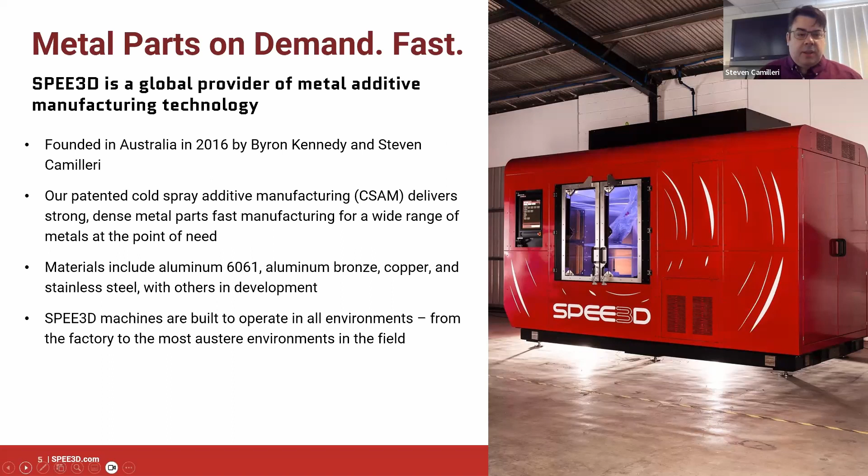A little bit of background on SPEE3D. As Aaron introduced, we're a company that makes cold spray additive equipment. The company's been around since about 2016, and really we focus on being able to make metal parts very, very quickly. Indeed, we've been doing a lot of work with various defense forces doing that in the field as well. So I might throw to the next slide, and I'll yield to Pierre.

Thanks, Steven. Part of this presentation today certainly couldn't have been done without our research partners. Some are on the academic side and some are on the commercial side, but we do things quite differently at SPEE3D.

With our technology, it's very much an open system. So you have the ability to really broaden the range of materials that you're able to work with and able to research, really. So with that increase in the material portfolio comes an exponential increase with the number of different applications and alloys that we can take a look at. And we can't do all of those things internally at SPEE3D.

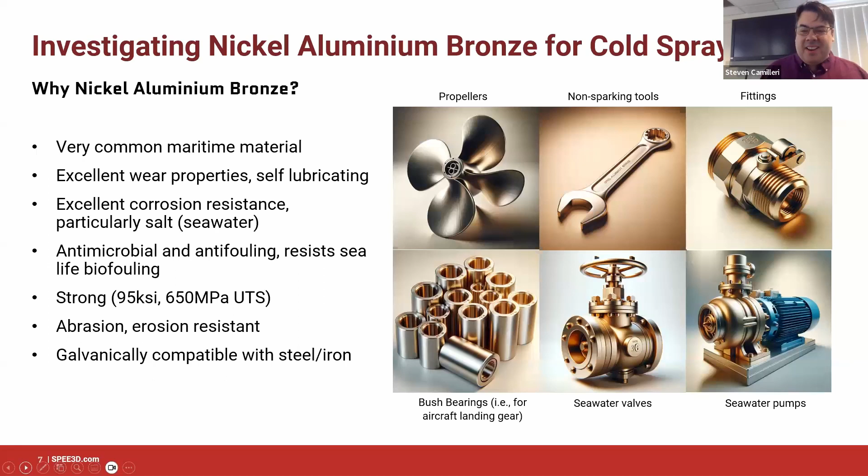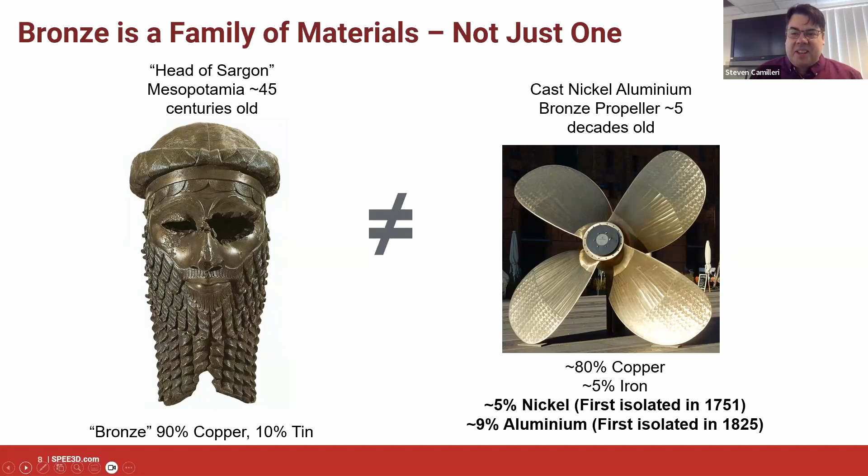On the right, you can see a ship's propeller made from nickel aluminium bronze. So these are not the same material, despite both being called bronze. Just like steel, there are many types of steel that behave very differently. There are many types of bronze that behave very differently. So in particular, the nickel and the aluminium are not ancient materials. They're modern materials that were isolated fairly recently. So that's a completely different material. And I just want to make that clear that we're not talking about the image on the left today. We're talking about the image on the right. Okay, next slide.

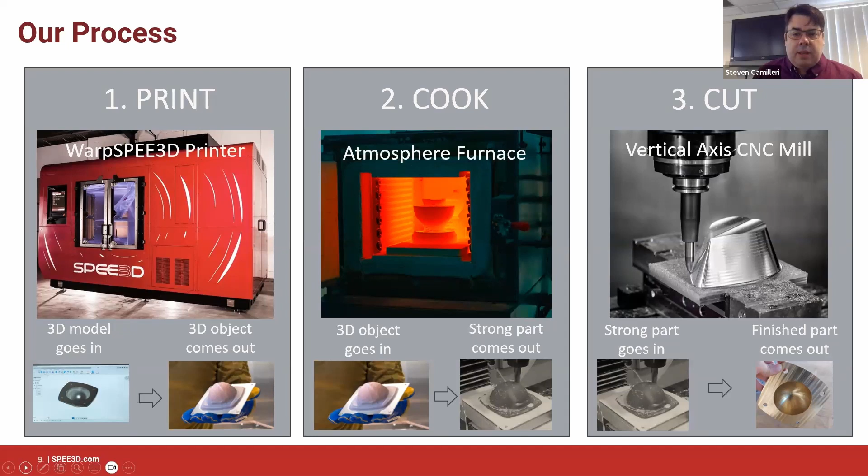So how do we go about developing a new material for our manufacturing process? Where's the work, where's the effort? So we just wanted to make a few points today to describe what we normally do. So where's the work? We start with the feedstock powder or powders. This is often an iterative process, you try something and then later on you try something else once you've determined it needs to be different. We have to work on the best way to spray it. So most of the cold spray community will understand this part very well. It's all about temperature and pressure and the tool pathing properties. The resulting material is then heat treated. We have to determine the best way to do that.

Heat treatment is a very open process. There are lots of different ways to do it, particularly navigating time and temperature. Then we test the material and determine where there are opportunities for improvement, and we go again. This iterative process, going through again and again, is how we develop a cold spray material.

Once we're at the point where the material performs as we would like, and we've determined that we can generate the material properties required to a minimum level over and over again, we establish our quality controls, we write our operating procedures and our quality processes, and then we generate a data sheet that provides a minimum performance level.

So this is a little bit unusual in the AM world, the idea that we're promising a minimum performance level from the material. Most of AM has a kind of suck-it-and-see approach when it comes to material properties. But if it's a manufacturing process, people need to be able to use it. To be able to use it, they've got to know the material is going to work.

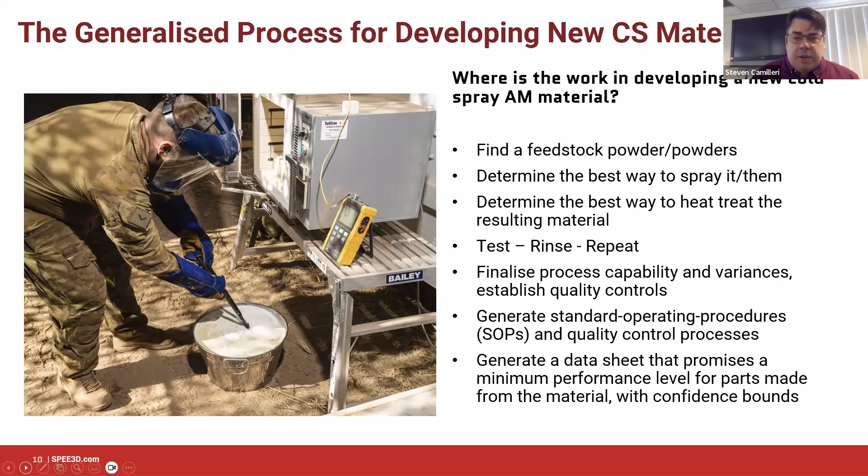The next step is to work out how to get that to deposit and then to hit the composition of the alloy that we're targeting. That's a non-trivial step for reasons that we'll address in a moment.

Having done that, we move into the heat treatment phase where we're looking at processes like homogenization and bond formation. The next step beyond that is hardening, because for any structural material, we have a strong preference for materials that have a thermal hardening mechanism. The reason for that will become clear in a moment.

At the end of all of that, you've got something that looks like an alloy, and then you do your tensile testing, as Steve said, and we look at that stuff very closely. We look at micros, we look at fractography, and we decide what we don't like about what's going on and how we're going to amend that. Then we go through that process of iteration.

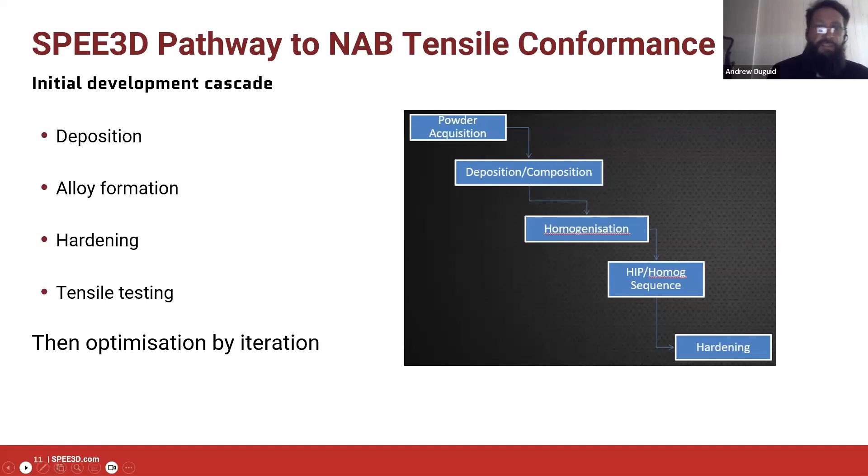They're all present on the grain boundaries. No doubt they've formed all sorts of odd intermetallics. It's possible there's been some inadvertent hardening—the thermal hardening mechanism has actually operated inadvertently throughout the production of that powder. What that means is that we're left with a powder that's not actually particularly sympathetic to being sprayed.

It's not to say that you can't do it. Obviously, people do it all the time, but you have to go to a higher degree of effort to overcome those sorts of problems. Another whole avenue that people explore here is solutionizing those particles and rendering them into a softer state—also a good way of solving the problem. But we take a slightly different approach to that, by and large, so we might move on to the next slide.

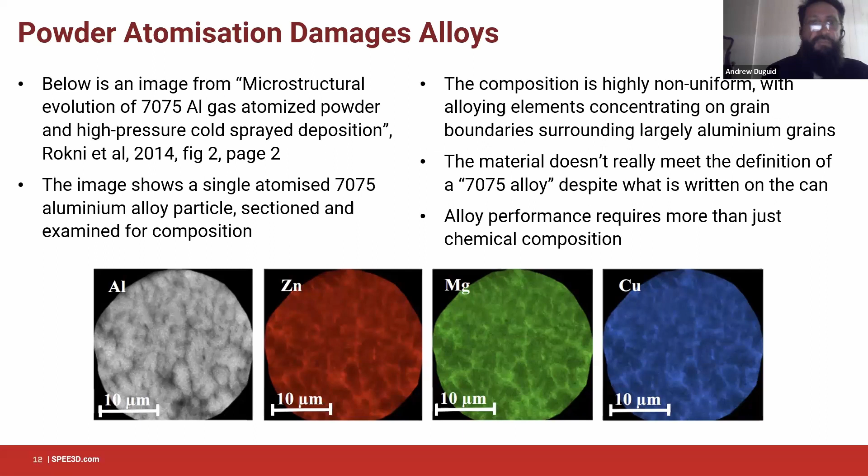It's difficult to spray highly alloyed powders. It's not impossible, but it does make life a bit harder. As a loose generalization, the higher the alloy content and the more aggressive the hardening mechanisms, the greater the difficulty you get. The powder's harder, it's more difficult to spray.

So what that means is you're bucking all of those other things, like higher expense in terms of getting greater nozzle energies, or living with poorer deposition efficiencies, lower build rates. And a critical one for us is what you're left with in terms of porosity and residual defects.

NAB is a quite rich alloy, its alloy content is about 20% and it's quite hardenable. So for us, it's quite desirable to find another way around that.

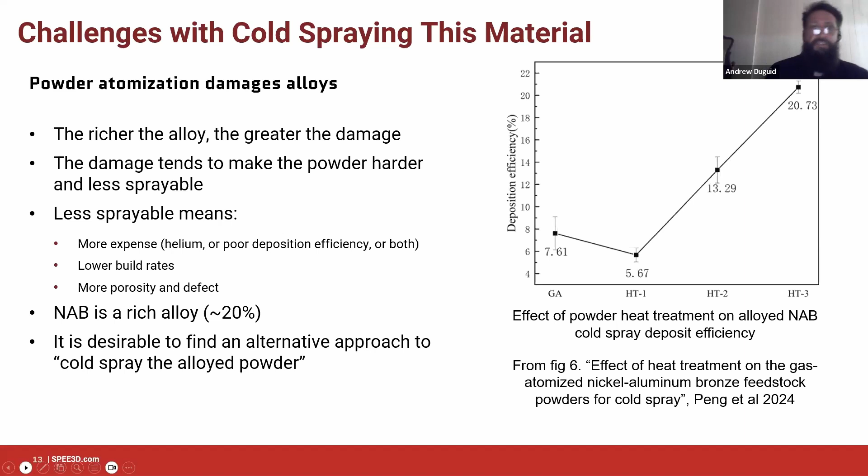Our observation right from the start, almost inadvertently, is that everybody starts out cold spraying elemental powders because elemental powders are soft and easy to spray. So we've developed a methodology where we look at either spraying blends of elemental powders or spraying combinations of master alloys. We take the basic alloy and break it down into more cold sprayable components.

That might be splitting the alloying elements into two major groups and spraying a blend of two powders that each have some of the alloy constituents in them. Or it might be actually breaking the alloy down completely and just spraying a blend of elemental powders.

Unfortunately for us, that's about the limit of feature formation in our AM process. If you're below 40%, you really can't form the features on the part particularly well. So that wasn't particularly attractive.

Happily, what we found is that when you sprayed the elemental blend, we got a pretty substantial increase in deposition efficiency. There's a slight trend with the aluminium content, and it seems to plateau out from about 9.5% on. So that's the first stage.

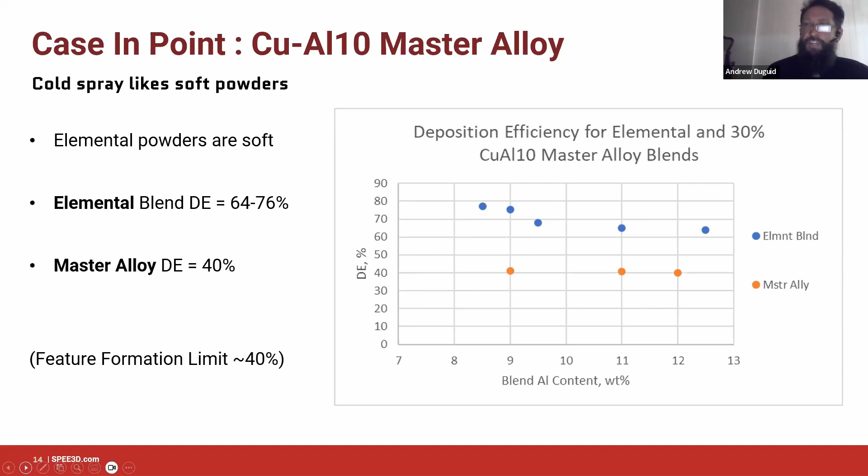We selected our powders and worked out how to get deposition. Then you can imagine doing this sweep across the aluminium content—dialing in the aluminium content of the blend so we wind up with the right amount of aluminium in the alloy at the end. This told us we were way better off just sticking with an elemental blend.

We start out with elemental powders, which is what we landed on. We blend those, we cold spray them. We do some heat treatments, winding up with a hardened alloy at the end. The critical thing to look at here is this homogenization process.

We're pretty happy with that. Anybody who comes from a powder metallurgy background would be overjoyed to see that—it's got almost no porosity and there's intimate metal contact, two very difficult things to achieve in classic powder metallurgy. And the question is, but that's not an alloy, that's a physical mixture. So what do we have to do with that?

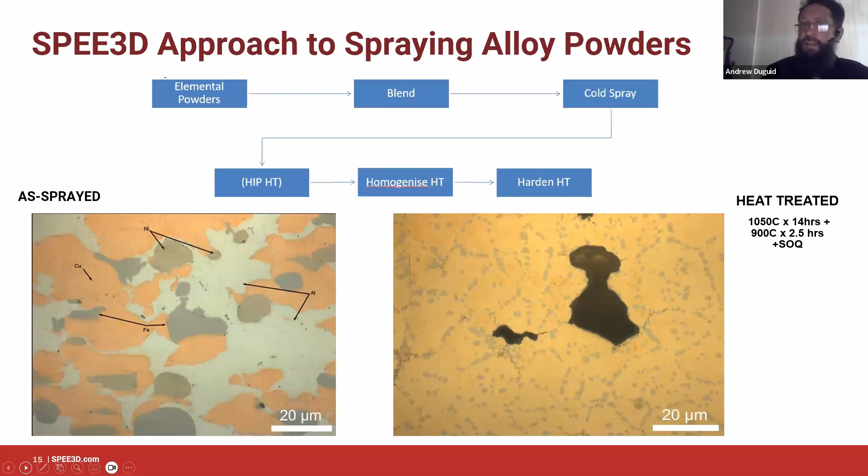If this was the first time we've done an alloy, we'd say that's fantastic - we've achieved homogenization, the microstructure looks pretty well resolved, and maybe we've got a little bit of a problem with porosity that we'll have a think about. You can see the heat treatment on the right there.

Okay, so here is where we started to really dig into developing the alloy and tuning the alloy constituents. This is why we'd start to look at what are we getting and what do we need to adjust.

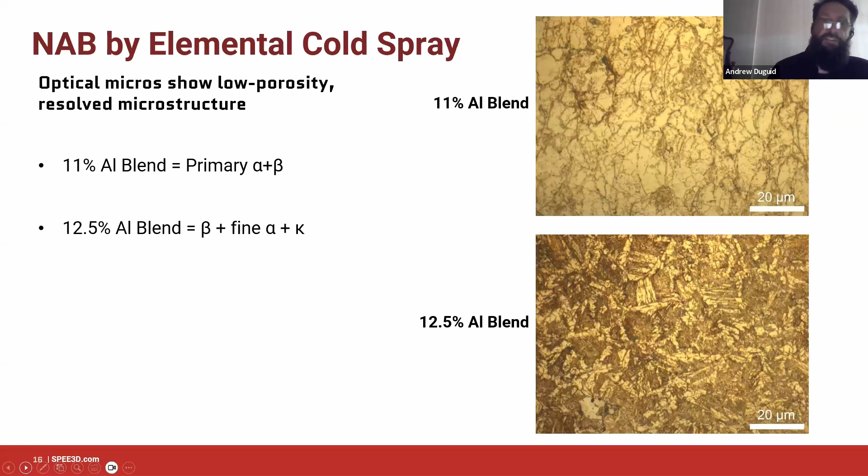The 12.5% blend is obviously mostly decomposed beta phase, sort of beta prime, once you've aged it. There's a little bit of fine alpha phase, and although it's not very clear here, there's actually quite a lot of fairly coarse kappa phase distributed throughout that microstructure. We don't like seeing an awful lot of intermetallic in a microstructure, so that tends to push us back towards the 11% blend.

That's more or less what we'd expect from the published data on this alloy. That's great - we've achieved a hardening reaction. We can now dial in the strength of the alloy where we need it, based on modifying the aging treatments. And as I said, the iron and the nickel must be participating in that reaction, otherwise it wouldn't be hardening in that way.

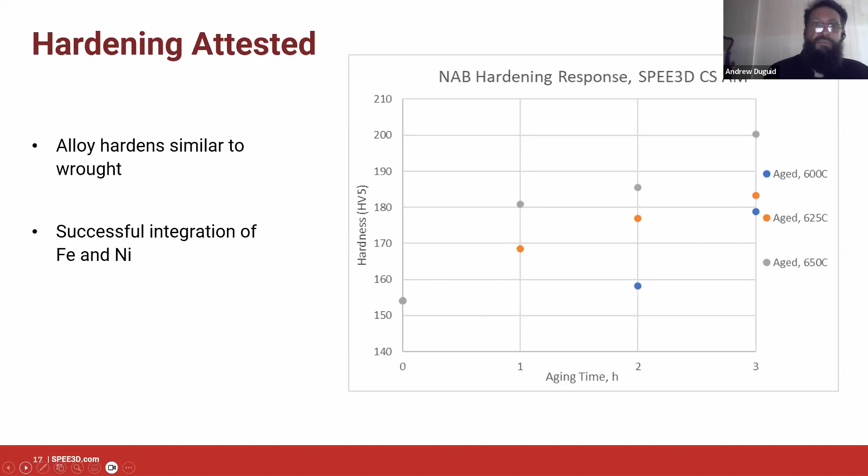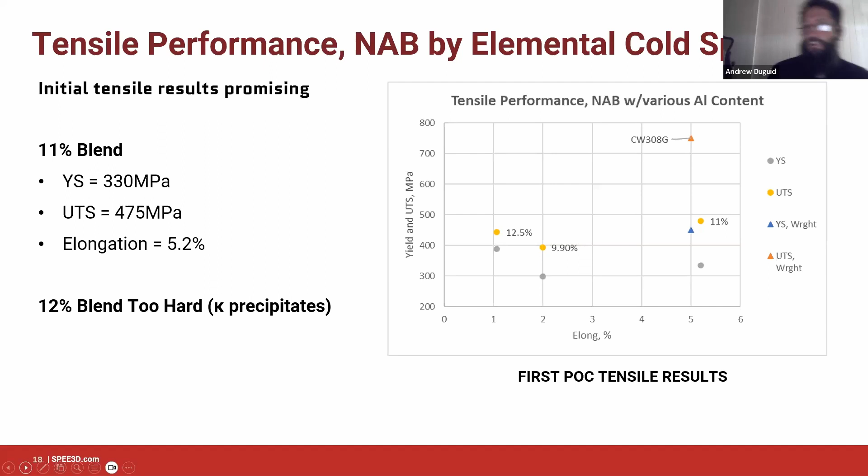So anyway, that's a good place to land in terms of a proof of concept. We're pretty happy with that. So we might go on to the next slide.

So this is with a little bit more optimization, looking at that 11% blend. We've got the previous data point there, and a second data point that we did with a slightly different heat treatment. And what I've done there is I've added in the 958 sand cast specification.

So how do you gloss that? Well, the first thing is that users have maybe got a choice about what they would prefer. You can have an alloy that's moderately strong at 330 MPa. Not an awful lot of ductility, but there might be applications where you'd want to use it that way.

Or you can go a little bit on the safer side and knock the yield stress down a bit, get a bit more elongation. And you're looking at an alloy that's got a yield stress that's comparable to the sandcast, or maybe a little bit above the sandcast value, not quite as ductile, but still enough ductility to be a serviceable engineering material.

So that's really great. That's a good place to land. There's more work to do, but we're pretty happy with that. And we can see users for that material. But we might go on to the next slide.

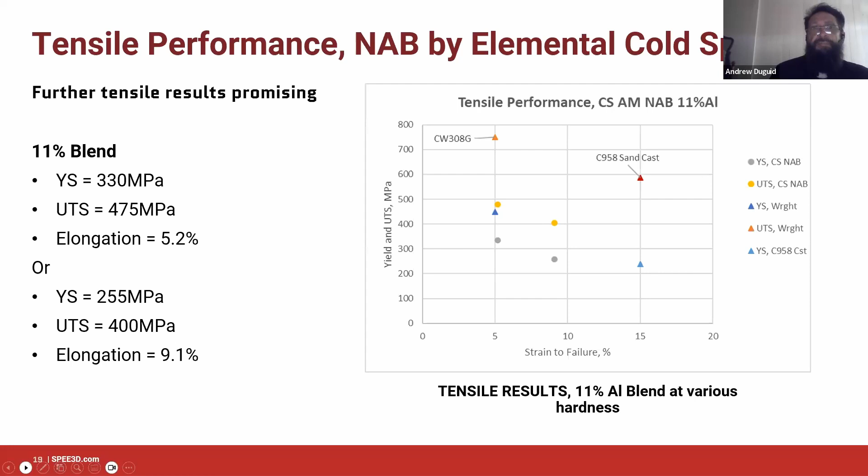Okay, the question that then arises is, are there other users out there who might want to use a higher performance alloy and are prepared to pay a bit of a premium for that? And an obvious next step for anybody who's got any background in casting or powder metallurgy is to look at hipping.

What happens if we add hipping into that process? Now, obviously, the pressure from the hip is going to aid the sintering process enormously, as well as collapsing some porosity. And that shouldn't be too controversial. One of the questions that pops up, though, is when do you do the hip?

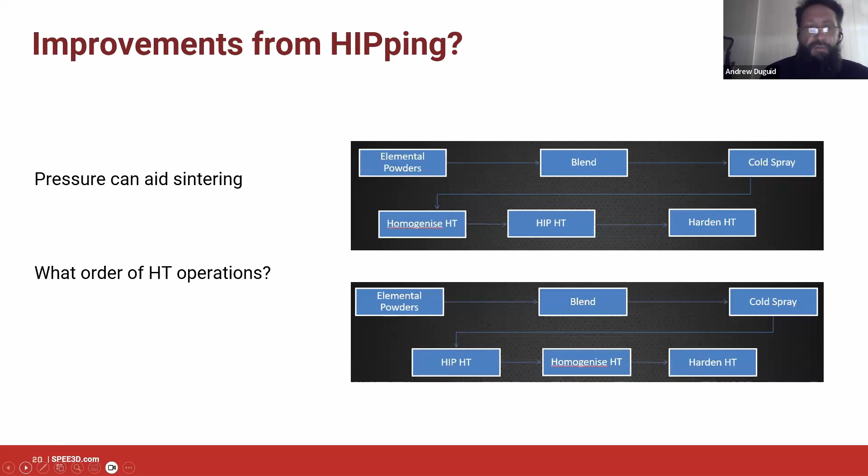So we have a choice that we could cold spray things, homogenize them as we've just seen ourselves do, and then run them through the hip. Or we could hip the material first and then conduct all of the heat treatments after the hipping process, once we've resolved all the defects. It was a hard call, so we decided we'd check both of those, and it turned out it was well that we did. So if we go on to the next slide.

So that's all well and good. But what we realized after we dug into it is that the hip cycle is nowhere near long enough or aggressive enough to completely homogenize the aluminium and the iron and the nickel, particularly the iron. And that means the homogenized step is still homogenizing the alloy after it's otherwise been formed. The problem is that the aluminium is gradually diffusing away into the matrix - there's no longer the potential to generate any liquid phase. Instead, you wind up with voids where the aluminium rich areas used to be, and nothing in that sequence is going to do anything about those voids.

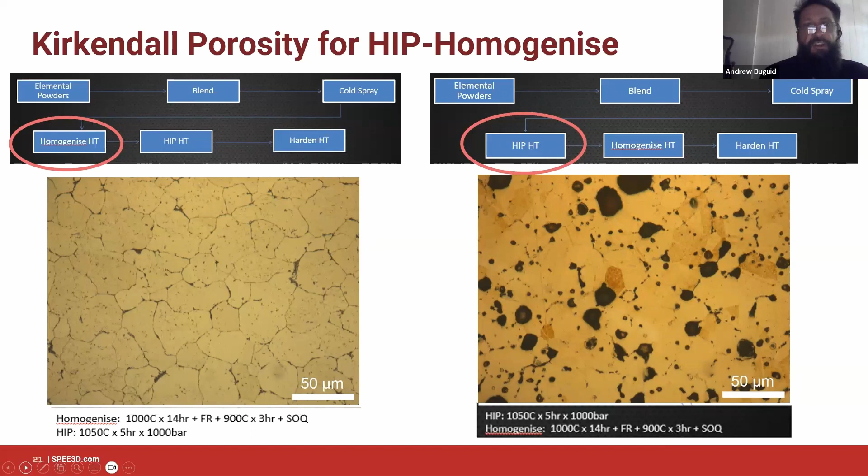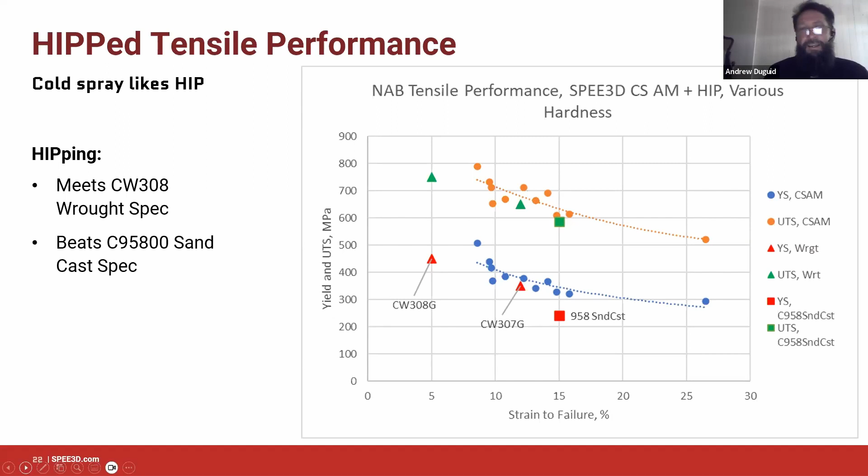Yeah, so summary. I think I was going to do the summary, so I'll just sort of punch through it. So basically, what are the takeaways from all of this?

Spraying elemental blends and then applying classic powder metallurgy heat treatments to them is a valid way to make high performance alloys using cold spray. It's a route to getting a good outcome. It's by no means the only route, and it's not the only thing we think of, but it's one that's worked pretty well for us in a bunch of cases.

Hipping obviously is a really useful addition, particularly to cuprous alloys, but you have to work out how to use it because there's other things going on, and you have to synthesize all of that. Really the punchline is that we're basically finalizing two variants of that material, an unhipped and a hipped version. We'll be updating this group in June on our progress on that. So that's me.

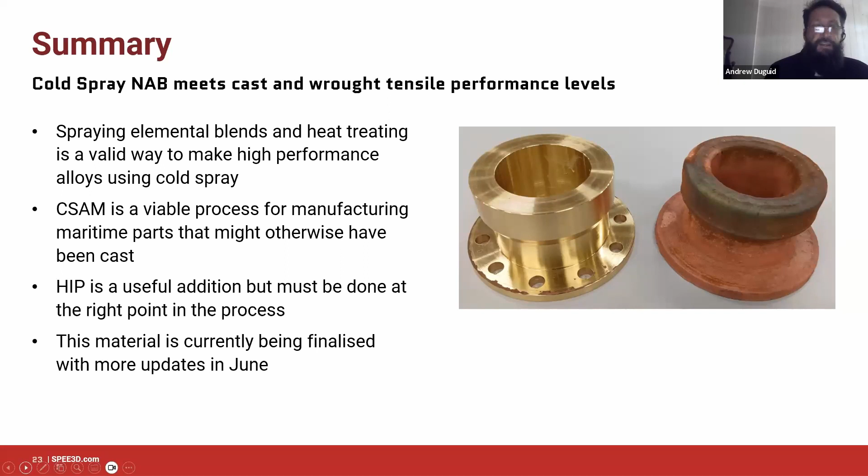So just to summarize, I talked a little bit about academic research, and one of the reasons I did that is there's a lot of researchers from academic institutions on today's call, so I wanted to speak to them. I wanted to rehash this idea that we do academic research differently with our partners. We're not just looking to sell machines, but we're actually looking to form partnerships with our customers so that we can work together. This particular presentation from Andrew and Stephen couldn't have come together without a couple of our partners, so they are very important to us. They do a lot of collaborative work with us, and again, we can't do it all. We have a tremendous number of projects we'd like to take on, but we don't have the bandwidth to do it, and we're looking for academic researchers to partner with us on that very process.

So the good news, next slide, is that there's a lot of funding out there in the world. Global stats, worldwide: $497 billion annually being spent on academic research, with a compounded annual growth rate of over 8% through the next 4 years. So it's a great situation to be in, right? Governments around the world are funding research, and they're putting their money where their mouth is, funding it at a higher rate than they do other projects.